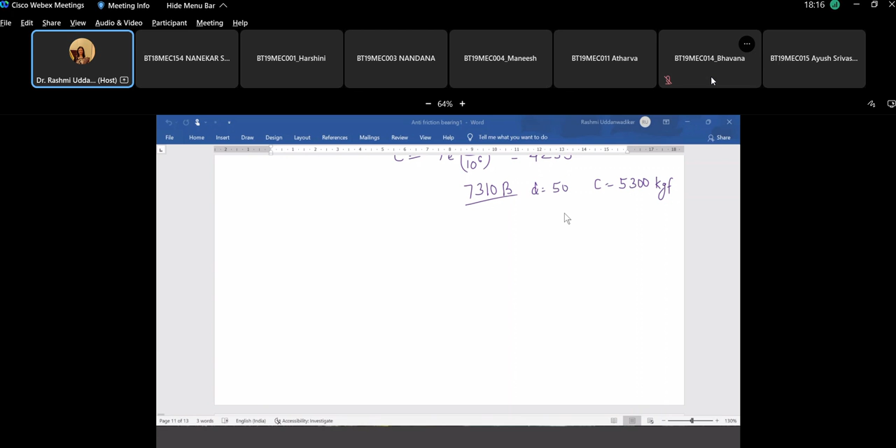How many of you are planning to come for offline classes next week? Saurabh, Ajwal, am I audible? So next Tuesday we have offline lecture? Ma'am, is it possible to take it in hybrid mode?

If it's hybrid mode, then again in the classroom I'll be carrying this laptop and my tablet and writing the same thing. If it is completely offline, then I can use at least blackboard and chalk.

Ma'am, can you continue hybrid till 10th April because some students are coming on 8th and 9th since they did not get reservation? But you had this information long back, right? That you have to come from 21st of March.

Yes ma'am, but we got the notice of offline classes compulsory from 1st April only one week back. Yeah, because nobody was turning up, so there was this notice of compulsorily attending it. We thought students are too enthusiastic to come to the campus, so if we give 21st, everybody would be here on 22nd, and we were surprised to see that nobody was coming.

Ma'am, even if it was not compulsory, students especially from UP and Bihar did not get reservations till 10th April. Okay, we'll see what is the number in the class accordingly, we'll manage.

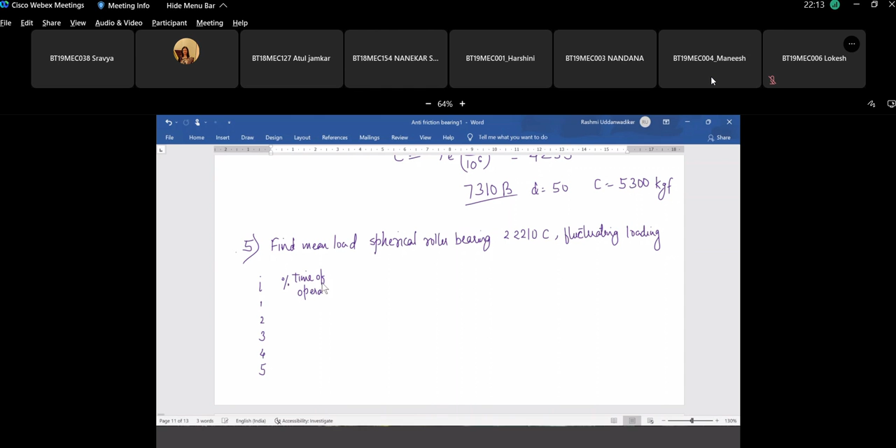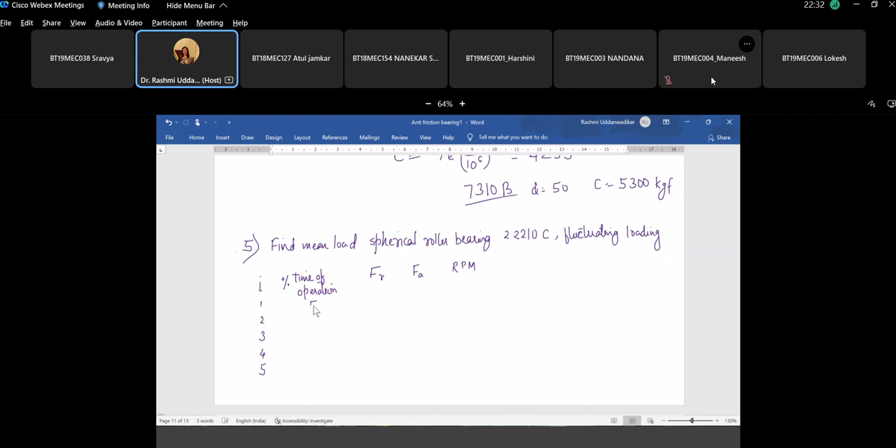There are 5 different stages in which the load is fluctuating, operating for different times, where radial load FR and axial load FA are also varying. Hello, am I clearly audible?

The load fluctuates for 5%, 10%, 60%, 15% of the time, and the remaining 10% of the time. So out of total 100% of the operation time, this is the distribution. For 5% of the total operation, radial load is 10 kilonewton, axial load is 2 kilonewton, rotating at 1200 RPM. Next: 12 kilonewton, 4 kilonewton, rotating at 1000 RPM. Next: 20 and 6, rotating at 800 RPM. Next: 25 kilonewton radial, 7 kilonewton axial, rotating at 600 RPM. Next: 30 and 10, at 400 RPM.

We have to solve at least 2 problems, so make sure you are doing it as fast as possible. We have to find the mean load for this variation, which means we have to find the equivalent load for each cycle.

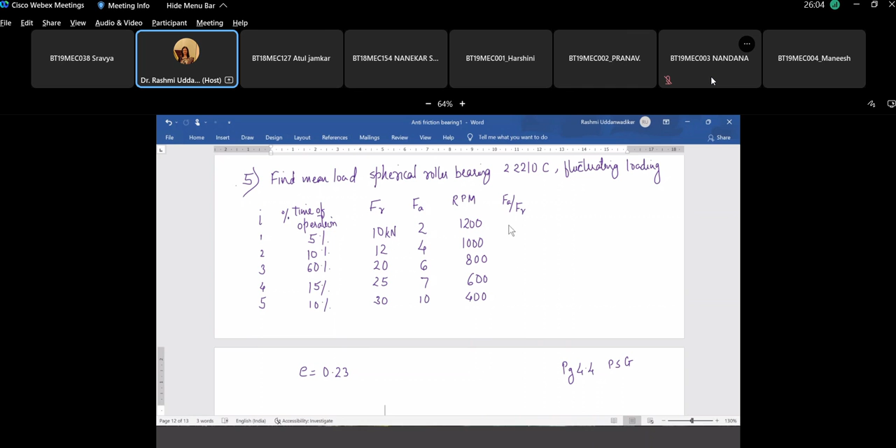Answers quickly please - 0.2. Next, for i equal to 2, 4 by 12 is 0.33. Next, i equal to 3, 6 by 20 is 0.3. Next, 7 by 25 is 0.28. Next, 1 by 3 is 0.33.

Which means the value of FA by FR for few instances is less than E and for others greater than E, which means the value of X and Y will also keep changing. We need X and Y for finding out the equivalent load.

So here when FA by FR is 0.2 and this is less than E, what is X and Y? If FA by FR is less than E for 22210C series, what are X and Y? One and 2.9.

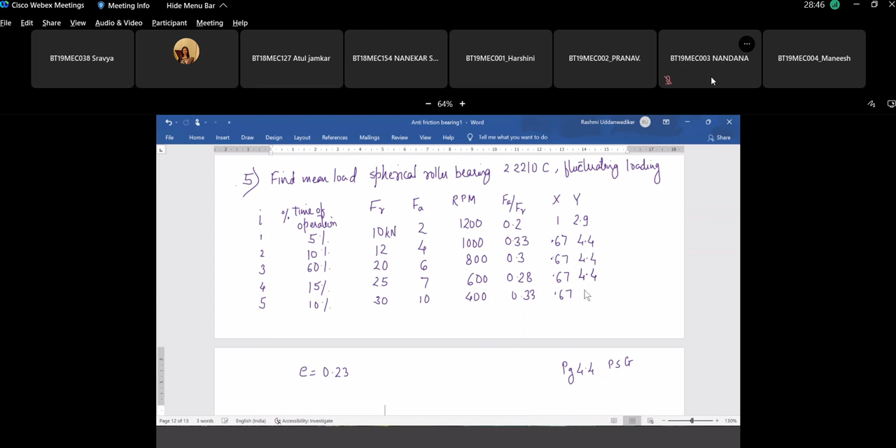So give me FE for each case now. Aman Pradhan is there, roll number 121. Has he attended any of the lectures? Ujjwal, Prathamesh? As per my attendance it is 0, just in case I have missed. So is roll number 121, so 120, 122 if they know. Okay, not a single class. Okay.

So you have to give me the value of FE, equivalent load, which is X times FR plus Y times FA. Nothing is mentioned about the conditions for K0, K1, K2, K3, so we are assuming everything to be 1. So give me FE for i1.

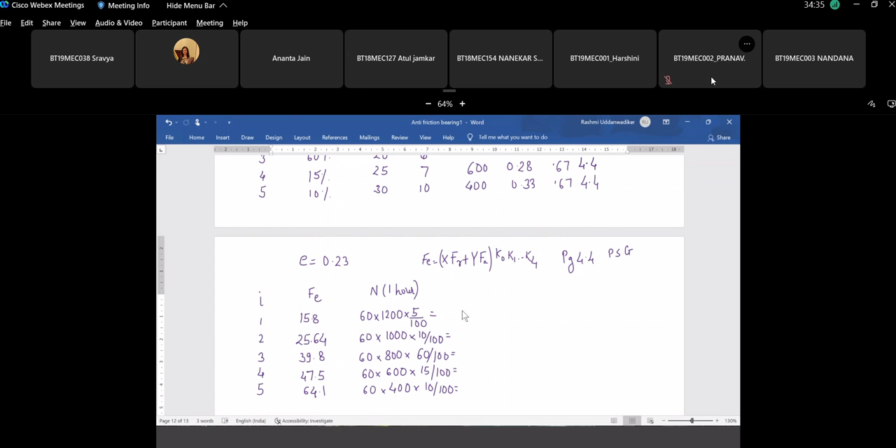Problems are not very difficult, just that they are of different types. So give me N1, N2, N3 quickly. Yes, so this is 3600 revolutions - N1. N2 is 6000 revolutions. Good. N3. Oh, very fast. So this is 28800. Next is 5400. The last one is 2400.

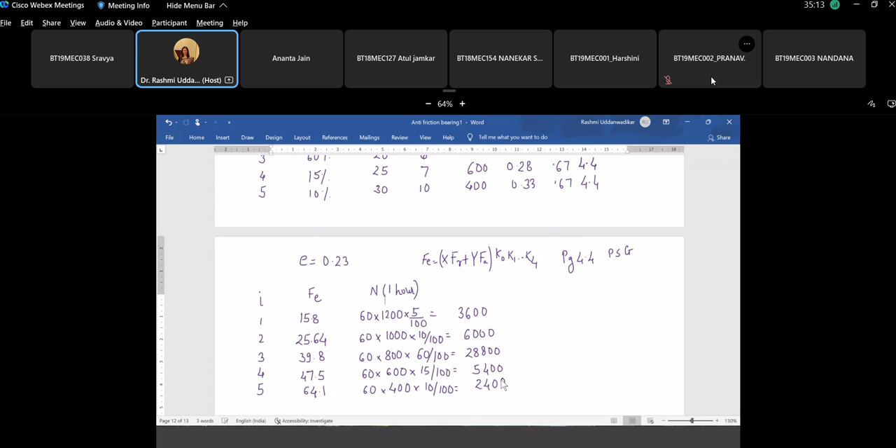And now how do you get the mean load? If you have FE1, FE2, FE3 and N1, N2, N3, how do you get the mean load? Shubham? How do you find the mean load for this variation? Tanvi? F1 N1 plus F2 N2 by 3? Fe raised to 3 into N. Is that correct?

It's the cube root of what? Cube root of - partial cube root of summation of Fe cube into N upon sigma N.

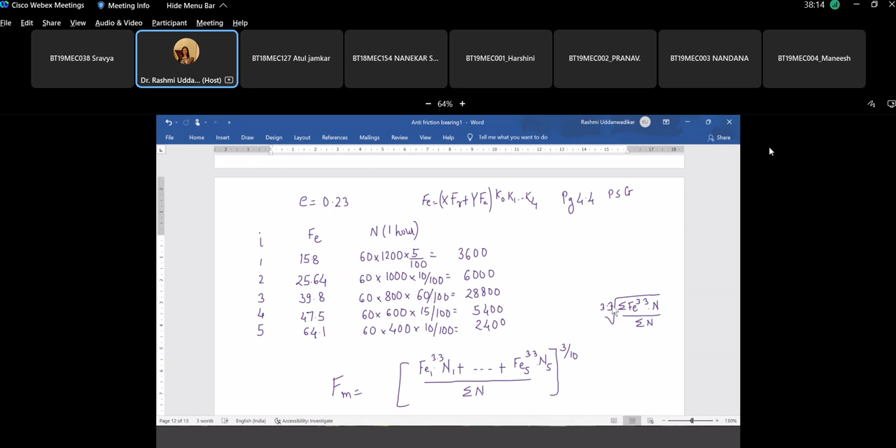The mean load will be Fe1 raised to 3.3 multiplied by N1 plus this, Fe5 raised to 3.3 into N5, upon summation of N, this whole raised to 3 by 10. So instead of cube root, it is this root of summation of Fe raised to 3.3 into N upon summation of N. So instead of 3, this becomes 3.3. So cube root is, you write it down as 1 by 3, and if it is 3.3th root, you write down 3 upon 10. Is that correct?

Pradyumna, is that correct? Pradyumna, you are from Access Core team. Okay, give me the answer. It is 10 by 33.

Square root of A is written as A raised to 1 by 2, right? So this is square root of 10 by 3, root over 10 by 3. So this would be written as A raised to 3 by 10.

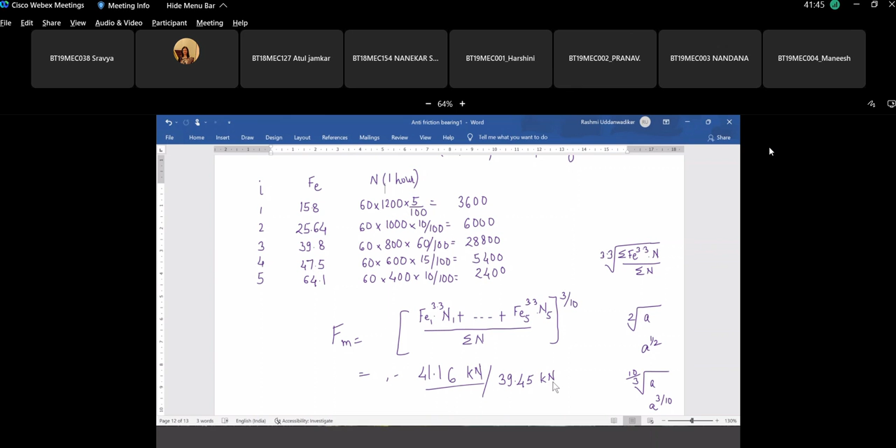So from this mean load, now you can calculate what is the life. I want you to do another problem - one last problem from bearings. Should we go for next? This formula for variable loading is also given in this PSG design data book. Somewhere it is mentioned that the formula will use K equal to 3 for ball bearing and K equal to 10/3 for roller bearing, and then for the cubic mean load, the formula is given on page number 4.4.

So if we are done with this, we are going for the next question. A cross section of an industrial car and the loading for its axle - I'm repeating, a cross section of an industrial car and the loading of one axle is shown in the figure. Based on the loading conditions, find the expected life of a 6310 bearing, rotating at 300 RPM. Assume moderate shock load.

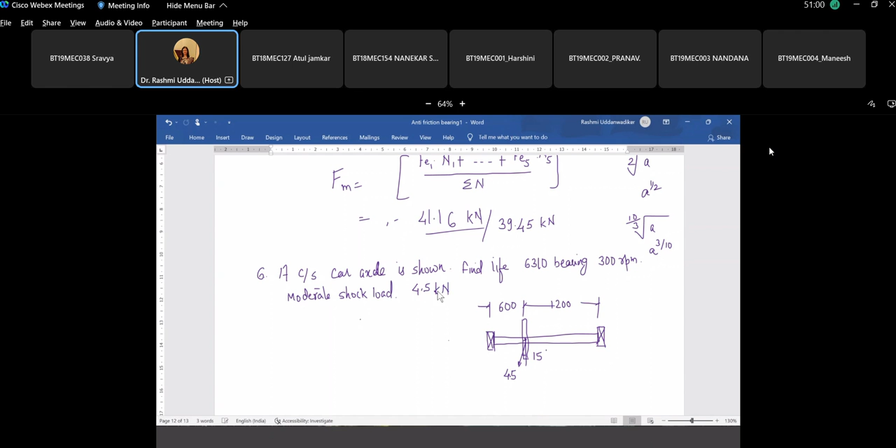This is 4.5 kilonewton load. There was some printing mistake in the book that I am referring to. So, sorry for this.

Okay, so now this is a shaft supported with two bearings. The shaft has a gear and this gear has a resultant load of 4.5 kilonewton, acting at an angle of 15 degrees from vertical. We have to see what are its radial and axial components and what are the reactions at the bearings.

So this is the left bearing. This is the right bearing.

What is its cos component? Which one is causing its axial and which one is its radial component? Its cos component is 4.5 cos 15. This is causing axial loading or radial loading on the bearings.

And its sine component, whether that is axial or radial. So its cos component, that is the vertical component, is responsible for the radial loading on the bearing, and its horizontal component is responsible for the axial loading.

Now you have to be very careful. This axial load is taken either by the left bearing or by the right bearing. There is only one force, so that has to be completely taken by the left bearing or by the right bearing. So normally whichever one is closer, we assume that the entire axial load is taken by that bearing. So the radial load gets resolved into the two bearings' reactions, but not the axial component.

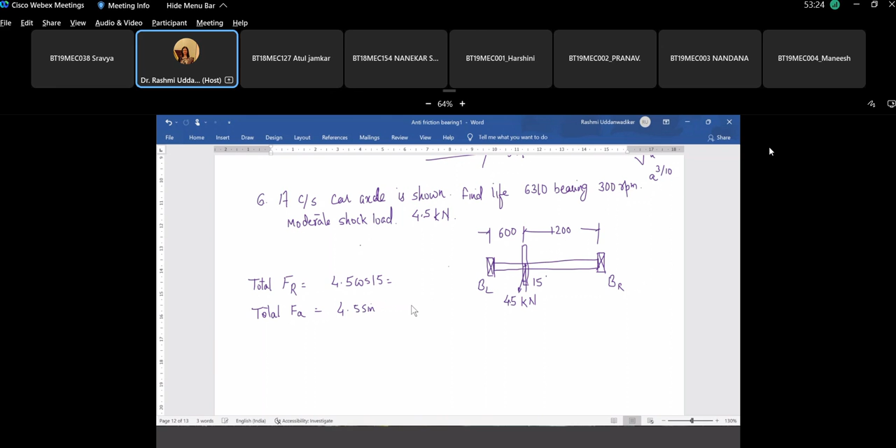So what is the radial component of the total load? 4.5 cos of 15, which is how much? And what is the total axial load? So radial is 4.35, axial is 1.16.

Okay, and if I resolve to get the reactions R1 and R2, or RL and RR, give me the reaction at the left bearing and the reaction at the right bearing, by taking the moments. Distances are given.

This is for the radial component. On the left side, and on the right, this is 1.448. Let me take it as 1.45 on the right. 4.35 minus this gives 2.89, 2.9.

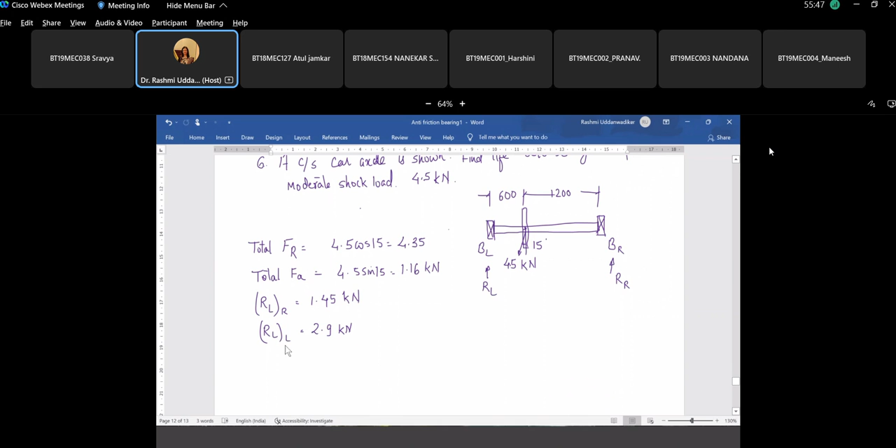We are designing the left bearing BL, which is subjected to a radial load of 2.9 kilonewton and an axial load of how much? 1.16.

Now this is like a simple problem that we are solving. Whatever is the axial thrust coming on the shaft, that is not resolved. So this thrust is either... here the thrust is in this direction, right, which is trying to move the shaft in this direction. So either this bearing is stopping or this bearing is holding the shaft in its position.

So whatever kind of axial load is there, during the time of design, we assume that this entire thrust is taken only by one bearing. That is not shared by both of them. So either it is getting pushed here or it is getting pulled over here. Okay.

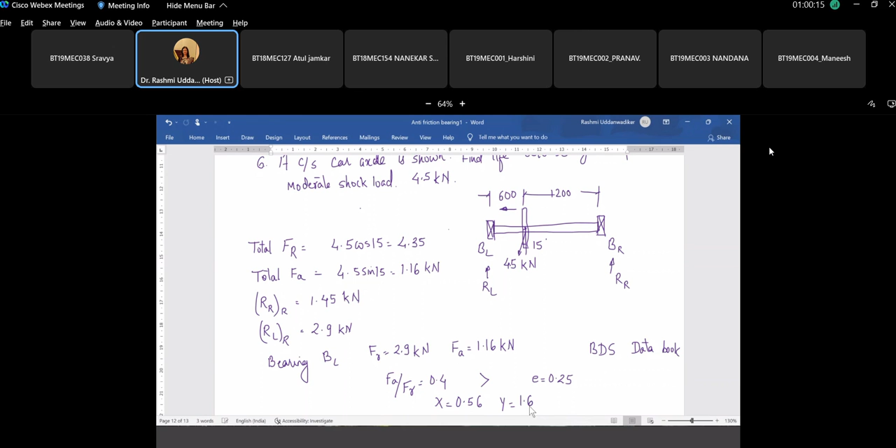FE equals X times FR plus Y times FA.

Oscillation factor, if nothing is given, we assume it is rotating at constant speed. Assuming no preloading, Kp as 1. Assuming, what do you want to assume for the race? Outer race and inner race? Which one you want to be fixed? Let the outer race be fixed, so this value becomes...

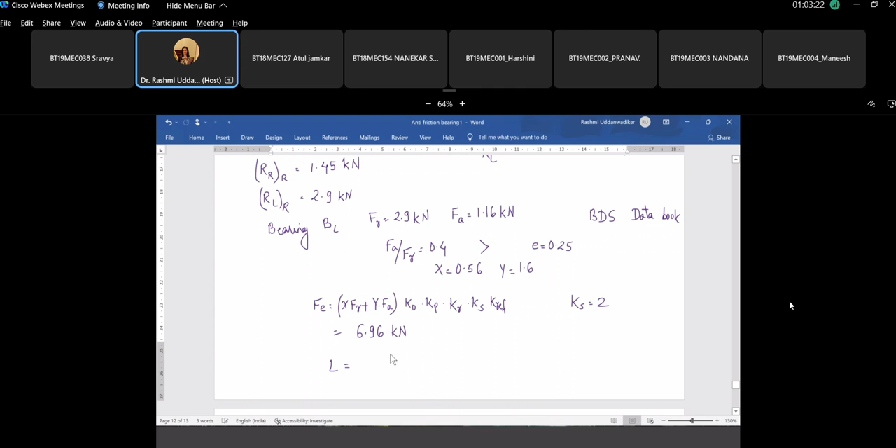What next? Rushika? We have to get the value of C. To get the value of life, which is C by Fe whole cube, we have to get the dynamic load carrying capacity for this deep groove ball bearing.

For 6310, 6 is the series, 6 indicates deep groove ball bearing, 3 is the series. So check for 0102 03XX for bore number 18. Kitna hai, bore number 10 or 18?

6310, bore number 10. So shaft diameter is 50. For 03 series, what is the value of C?

From the Shivalkar design data book, refer to 03XX series for bore number 10. C is 48,000 Newton. Convert this into kilonewton, take it as 48.

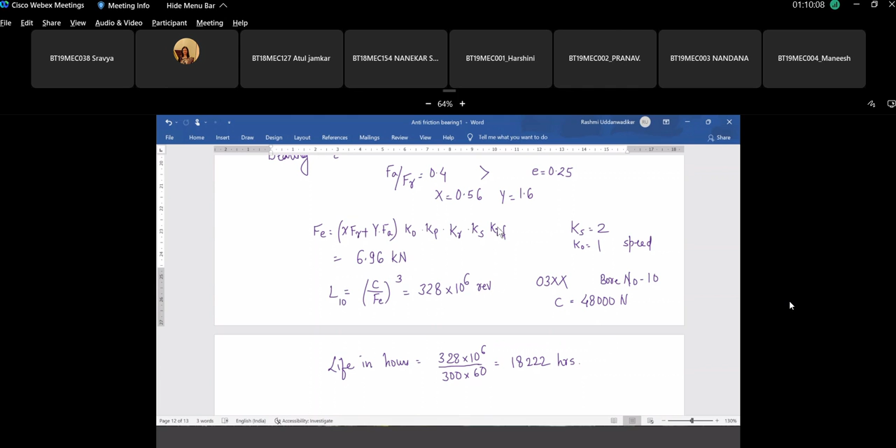Amey, any doubts? Amey? No. Tanvi? Shravya? Shravya, everything is clear? Only with 4 or 5 questions? Ambika? Very smart batch. Well, thank you.